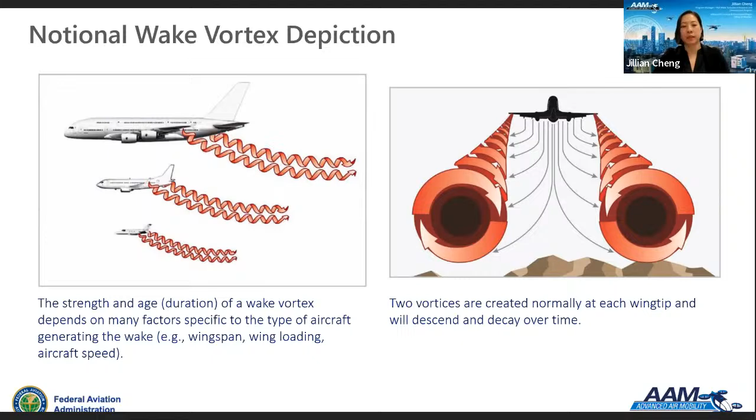The factors that affect the wake strength can include wingspan, wing loading, the distribution of the weight over the wing, and very importantly, the aircraft's speed. Wing configurations such as the positions of the flaps, and the air density, how the altitude, also play a factor in the characteristics of a wake vortex, its strength and its decay time.

So in the FAA Wake Turbulence Research Program, we analyze proposed and current procedures for wake safety and efficiency improvements. For example, I just mentioned our wake RECAT work. Aircraft have been historically classified by a single metric, which is max gross takeoff weight. That metric classed the aircraft into heavy, large, small, and then later super weight classes that have wake separations associated with them. We do know that there are more factors and parameters than just weight alone that affect wake behavior. With RECAT, we tried to separate those factors for our separation assessments.

So our team sought to define separations using factors that more accurately affect the wake behavior and to reduce the inefficiencies in that 4 weight class system. We were able to increase efficiency by recategorizing aircraft while maintaining that same target level of safety. The Wake Turbulence Program at the FAA researches future automation updates to increase efficiency and safety in the NAS. Using that RECAT example, we are working on a dynamic pairwise wake separation solution that could take advantage of future automation systems and dynamically change wake separations based on current and forecasted winds from both ground sensors and aircraft-based observations. Wake separations can be safely reduced by taking advantage of stronger environmental winds, as wake decay is accelerated by ambient turbulence caused by winds.

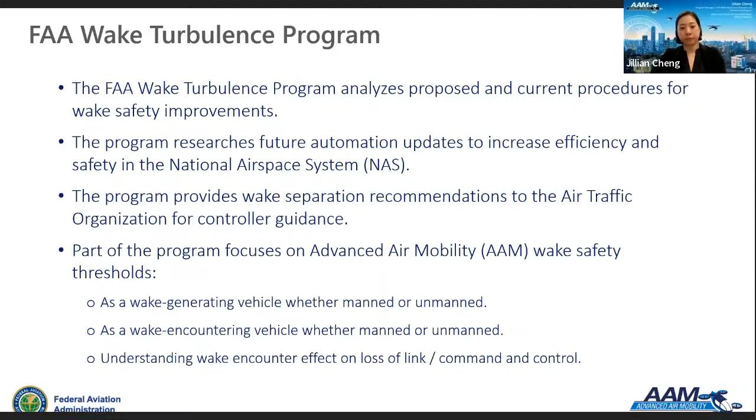The bread and butter of the FAA's Wake Turbulence Research Program is our data collection effort. We use this to capture and understand wake behavior using real data with sensors fielded. Our wake data collection is focused on gathering data in situ from real life situations from those wake generating aircraft. So our current wake data collection campaign uses established sensor locations at airports, currently San Francisco International Airport and JFK Airport in New York, that have a high number of significant wake generators, namely heavy and large aircraft, as larger airframes generally produce a stronger wake profile.

Our database of wake behavior feeds into the development of our wake models. We use these models to analyze aircraft for procedure development and wake separation recommendations. This data informs our wake separation recommendations for smaller vehicles, such as AAM aircraft. The types of data that our data collection effort captures is wake vortex position and strength as a function of time, atmospheric conditions like the wind at the time the data was collected, and aircraft type. With this database, we can apply that into our models and calculate and assess all sorts of different procedures and separation standards.

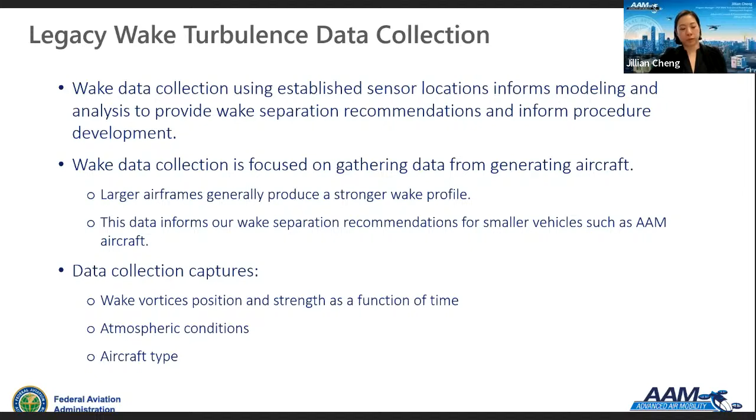The FAA Wake Turbulence Program has existed since the late 90s, though research and data collection on wake vortices and wake behavior has been going on since the 1970s, namely through NASA's research programs. The evolution of wake measurements and tools went from using aircraft smoke visualizations in the 1970s to using acoustic radars in the 1980s to the building of wind lines in the 1990s. Wind lines were a line of propeller anemometers along the end of the runways that would capture the strength and the transport of the wakes along the ground as the aircraft land.

OGE is a region where you typically see vortex roll up with nice circular vortices, and where you see a typical descent and decay. NGE describes a region approximately 1 wingspan above the ground, where the vortex interacts with the ground. They will move outward and they will decay faster.

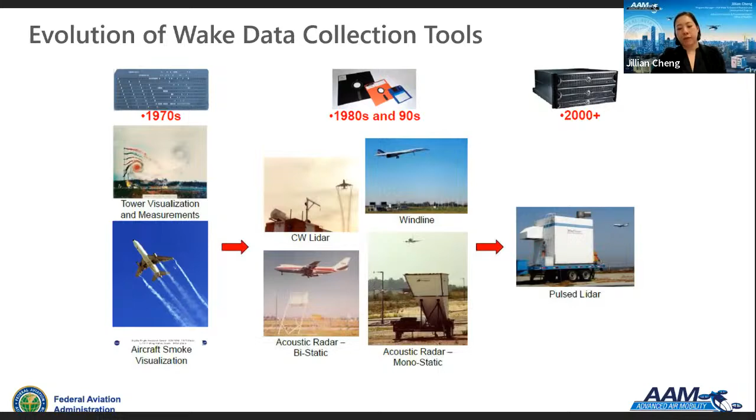Wake turbulence separations are assessed using specifications and performance characteristics of the aircraft, both as an aircraft generating a wake and an aircraft encountering the wake. The wake turbulence separations are applicable when the air traffic organization is providing separation services. For example, in IFR, or instrument flight rules.

Aircraft with no published wake turbulence categorization and separation will receive by default 10 nautical miles in front and 10 nautical miles behind. It'll receive a no weight designation in the automation system. This is for aircraft that have not been assessed for wake turbulence that may have entered the system. And the 10 in front and 10 behind is used for conservative safety separations.

So the FAA assesses and recommends separations smaller than that 10 nautical miles prior to aircraft entry into service. The goal of that is to reduce any constraints on capacity in that airspace. It is our goal to do that separation assessment prior to entry into service so that those aircraft would receive something smaller than that 10 in front, 10 behind.

The timeline on how quickly that happens is really dependent on an understanding of the aircraft's performance specifications and operating profiles. Additionally, rulemaking and procedure development for the integration of AAM vehicles may show that further analysis for wake on AAM operations may be required.

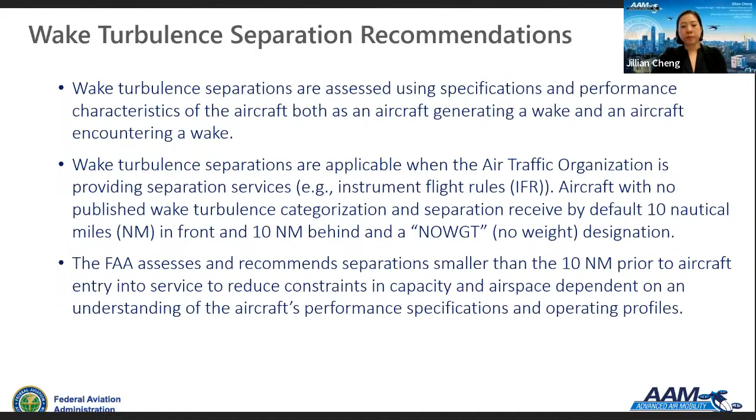All aircraft have type designators assigned from the International Civil Aviation Organization, or ICAO. We can see up to around 100 new ICAO type designators per year, and we can be asked to provide wake separation recommendations for those up to 100 new designators. These aircraft can include traditional fixed wing aircraft, UAVs, and now powered lift advanced air mobility aircraft.

All of the aircraft that we provide separation recommendations for follow this basic process outlined on this slide. The FAA receives notification of a new aircraft type, either from the manufacturer or an updated ICAO type designator list. And if the specification and performance data is not available publicly, the FAA connects with the manufacturer, or in some cases, an operator of that aircraft. The FAA uses proven methodology to develop a wake turbulence separation recommendation.

The analysis required for developing a separation recommendation can be straightforward or it can be more complicated, depending on factors like aircraft complexity. For example, multi-rotor aircraft versus traditional fixed-wing aircraft, or aircraft that are close to the boundaries of existing aircraft categories. The timeline for developing recommendations can vary from a few days to over a year, depending on those factors. The development of the separation recommendation for the Boeing 777X took quite a bit of time due to parameters like a very large wingspan, which is larger than the 747-8, and its folding wing capabilities.

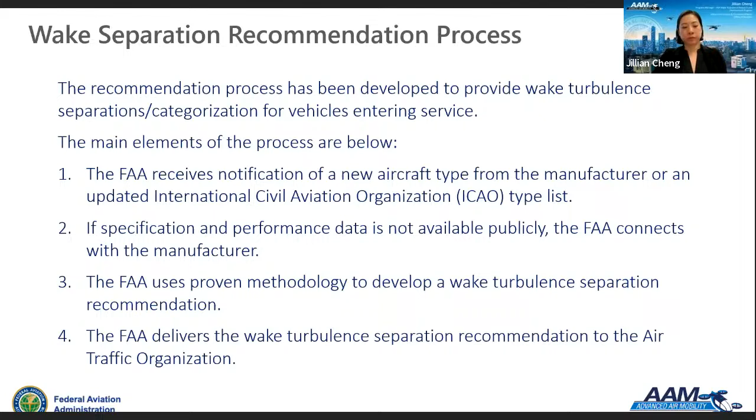We need a good understanding of the concept of operations, which is also an important factor in our assessment, especially where integration with crewed aircraft may be a factor. The vehicle speed for different phases of operation are especially important, and we will request different speed profiles for phases of flight like approach, departure, and any transition points, and any speeds associated with different configuration changes of those aircraft. We'd like to know how the aircraft will interface with other aircraft, whether the planned operation will occur on airport or outside the airport operations.

We would definitely want to have more information on the aircraft's flight control performance, such as roll, pitch, and yaw rates, and any upset recovery information that we can obtain about the vehicle. In the cases of powered lift advanced air mobility aircraft, we are more concerned with this aircraft as a wake encountering aircraft rather than a wake generating aircraft. These parameters of roll, pitch, yaw rates, and upset recovery information will give us a better understanding of the aircraft's behavior when encountering the strong wake of another aircraft.

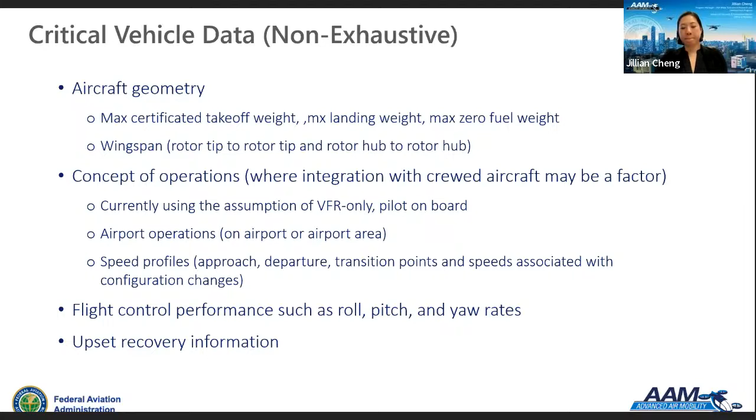Our research on wake turbulence is ongoing, and we will continue to monitor procedure development regarding the integration of advanced air mobility vehicles in the national airspace as regulations are codified. As more information on potential and planned operations of powered lift vehicles emerge, additional wake turbulence assessment could be required. For example, the design of route structures for the integration of AAM operations around current high-capacity airports. Our team stays connected to the different organizations within the FAA to make sure we are able to do those additional wake assessments when required. That can include the operational areas for vertiports, either on airport or near the airport, and the frequency of arrivals and departures.

Our team is also anticipating the future transition of AAM operations to remotely piloted or autonomous IFR certified vehicles. For vehicles that are remotely piloted or autonomous, there may be changes in command and control functions or upset recovery characteristics. As the NAS is evolving to accommodate different aircraft types and operations, the FAA Wake Turbulence Research Program will continue to evolve and provide wake assessments with wake safety as our goal.

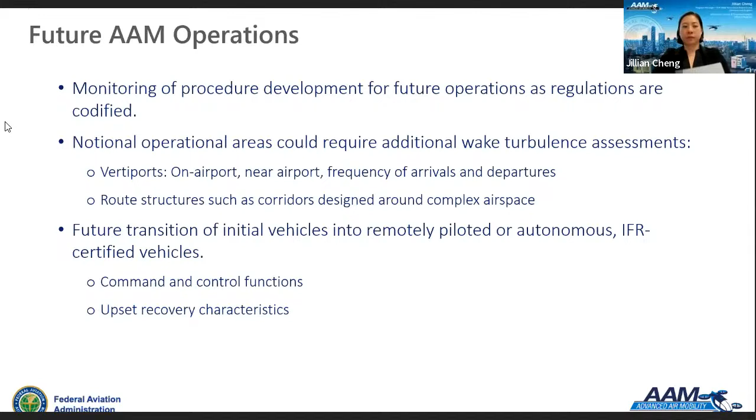All right, Jillian, does that conclude your presentation? It does. All right, well, thank you, Jillian, first and foremost, for this informative presentation. It's really interesting to know that new aircraft like electric powered lift will still go through the same time-tested, science-based, and data-driven assessments that keep our skies safe.